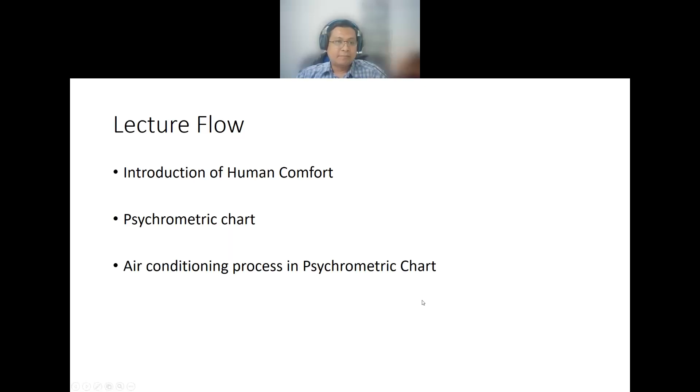In this moment, I will touch about three subtopics regarding air distribution: introduction of human comfort, psychrometric chart, and air conditioning process in the psychrometric chart. Okay, we will go in deep about these subtopics. So now we go first on the introduction for human comfort.

Human comfort expresses the level of satisfaction with a matter condition which occurred in the environment according to the perception of the individual. The most common matters are heat, thermal energy, air purity, sound, and lighting. So we relate comfort not only to temperature but also to sound or lighting.

Sometimes lighting makes some persons not comfortable, because every person has a sensitivity to lighting. Like me, for example, I'm very uncomfortable with lighting in a warm condition, warm colors like yellow. That's very difficult for me because I cannot see clearly in that situation. And then sometimes sound.

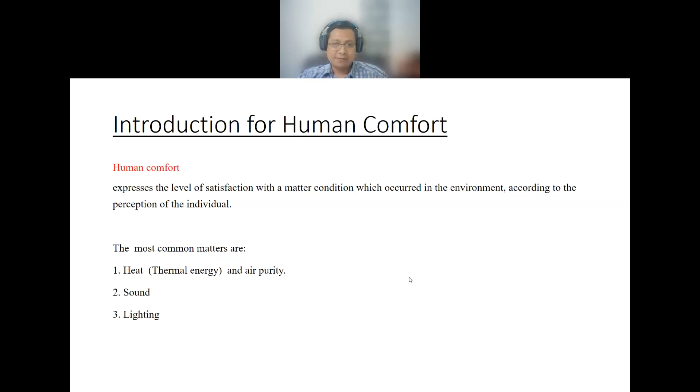Some places are very noisy, so it's very difficult to concentrate when we try to start to work and finish. It may take a long time, because it's difficult to perform well in a noisy condition. And sometimes being too sweaty makes it difficult to concentrate in our work. And then air purity may be influenced by the outdoor condition, or sometimes it's very dusty, or there's not enough oxygen supply.

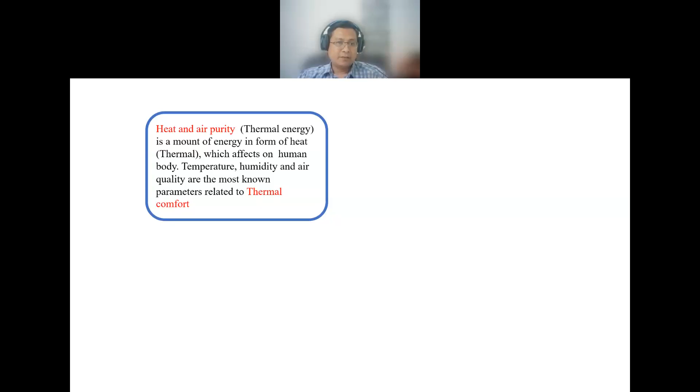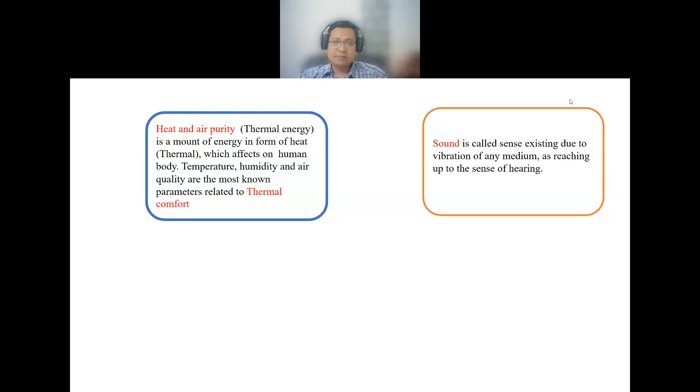Thermal energy is the amount of energy in the form of heat which affects the human body. Temperature, humidity, and air quality are the most known parameters related to thermal comfort. Sound is a sense existing due to vibration of any medium reaching the sense of hearing. Noise is the sound that causes discomfort. The procedure that overcomes the noise is called acoustic design. The acceptance level of sound is called acoustic comfort.

Sometimes music makes us relax, so we need to hear some music, maybe classical, to make us comfortable. But some persons work with a certain type of music, maybe rock. That cannot be mixed; we cannot generalize the condition to other persons. So different person, different comfort in sound.

Like me, maybe I need classical music with piano, or sometimes classical guitar and violin. But some persons need a sporty condition, to make the heartbeat more active, so they need sound with a high-speed beat. Only certain persons can work in that condition, so we cannot generalize it.

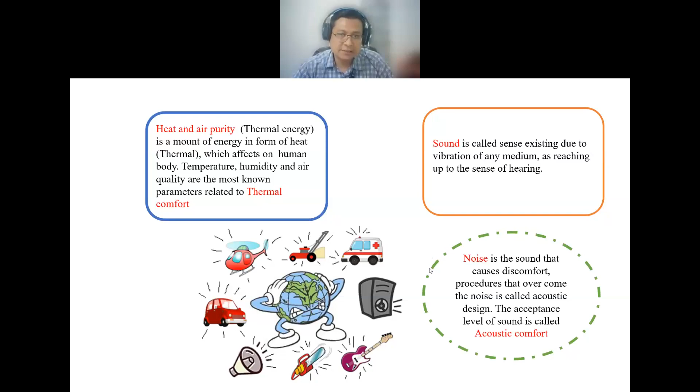Okay, now we're touching on lighting. Lighting is the amount of heat in the form of light that is adequate for visualization. Daylight and night light quality are attributes for sensory comfort. The acceptance of brightness and reflectance level for the eyeball is related to visual comfort.

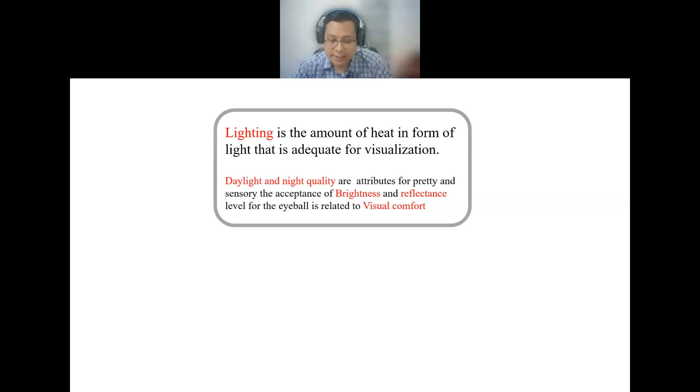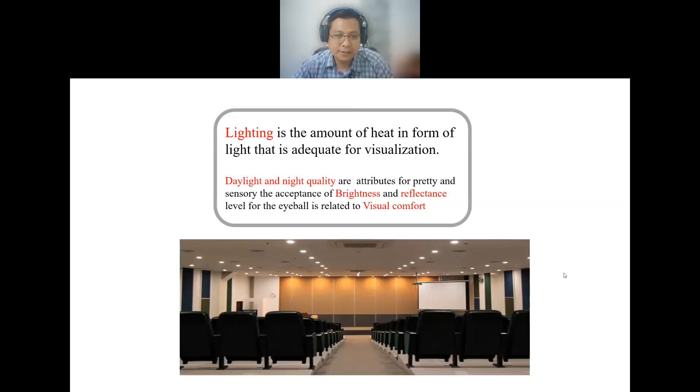As I mentioned before, sometimes a person is not comfortable with the tone of lighting. Like me, in yellow lighting I'm not comfortable. It makes things unclear when reading or in my work; maybe I need to type, but with that lighting condition it's difficult for me, and I cannot read in that tone of lighting. Okay, this one is an example of lighting comfort.

Based on human comfort, ASHRAE will guide us how to follow all condition parameters to create the comfort condition in a certain zone. Let's say this condition is for a seminar, or for a study room, or comfortable only for a theater. It's different, depending on the application.

The principal purpose of an HVAC system is to provide conditions for human thermal comfort. Human thermal comfort is a feeling of the human body when it tends to accept the thermal surrounding environment with indoor air quality. So as long as we can accept all parameters like air quality, temperature or humidity, we can consider that under human thermal comfort. This is considered under indoor air quality.

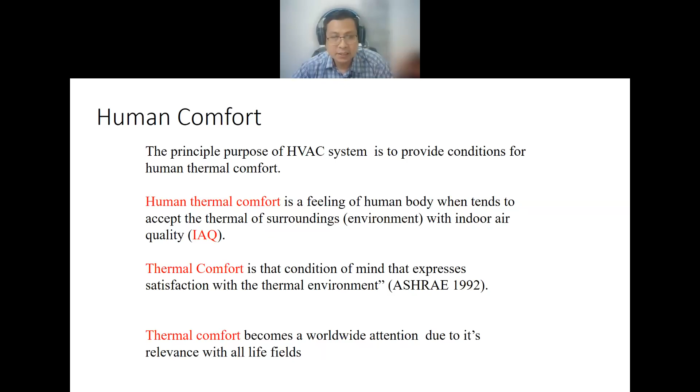Thermal comfort is that condition of mind that expresses satisfaction with the thermal environment under ASHRAE criteria. Thermal comfort has become a worldwide attention due to its relevance to all fields of life. Actually, now any building room is already equipped with HVAC. It's difficult to find a building without HVAC. Any building now is already under HVAC control.

How to find out the human comfort provided in a certain building? How to measure it? Human comfort is affected by 6 main factors. Among them, four are called environmental factors, while the rest two are called personal factors.

Environmental factors can also be provided by HVAC control, so we can condition it even near an unsafe environment, let's say nearest to industry with high emission or pollution. We can design the HVAC condition in the building, and we can design the dry bulb temperature condition by HVAC.

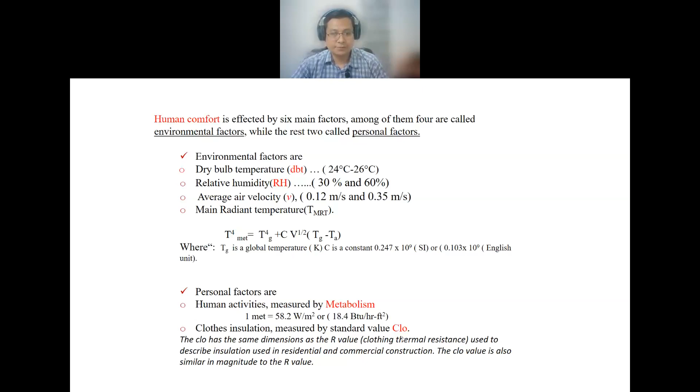So a lower CLO means lower insulation. If the CLO is higher, it means the clothing covers and protects more from the ambient condition. So we measure this using the unit CLO. We can check the CLO values later on.

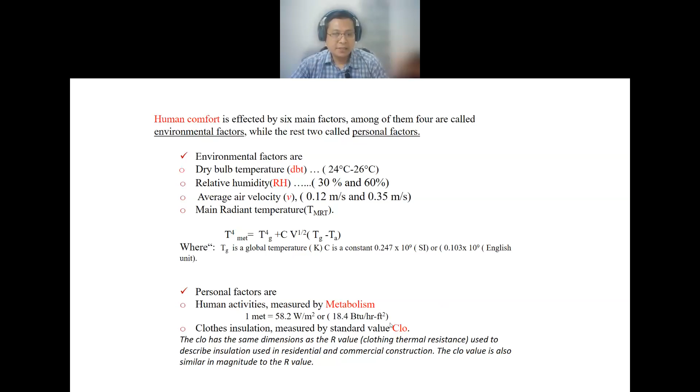This one is metabolism measured in normal human activity: one metabolism unit is 58.2 watts per meter square, or in British units, 18.4 British thermal units per hour per square foot.

Heat balance for the human body involves metabolism, heat generation by conversion of chemical energy due to digesting food. This differs by person and condition, but we can generalize and take the average condition of the person. Blood circulation and respiration will be influenced by the thermal effect caused by human activities.

Metabolism rate and clothing insulation can be determined directly from the total average heat generation and clothing insulation tables respectively. Metabolism rate depends on the activity, age, size, and gender.

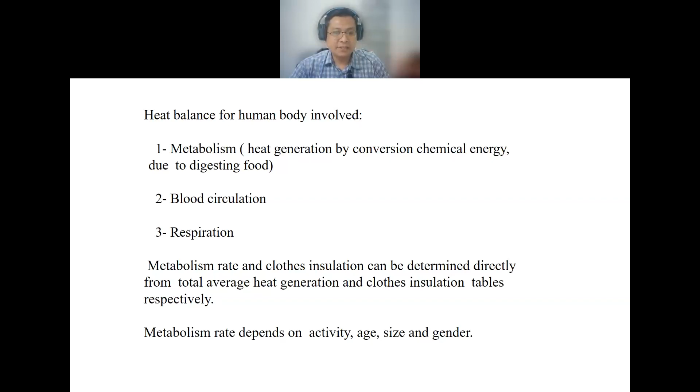Let's check the table of insulation caused by wearing activities. Let's say working in a short sleeve shirt; we will measure lower insulation because the body isn't covered, so it's exposed to the environment and the dress cannot insulate the thermal.

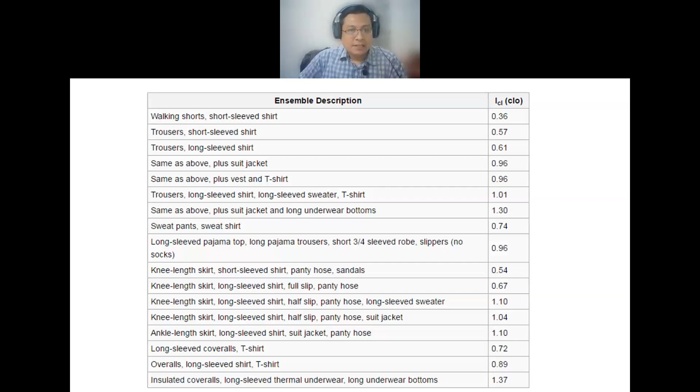Then with trouser and short sleeve shirt, trouser and long sleeve shirt, the insulation becomes increased because it's already long sleeve. You can see this increase. Same as above, plus jacket or suit jacket, it increases further. This is linear to the level of clothes covering.

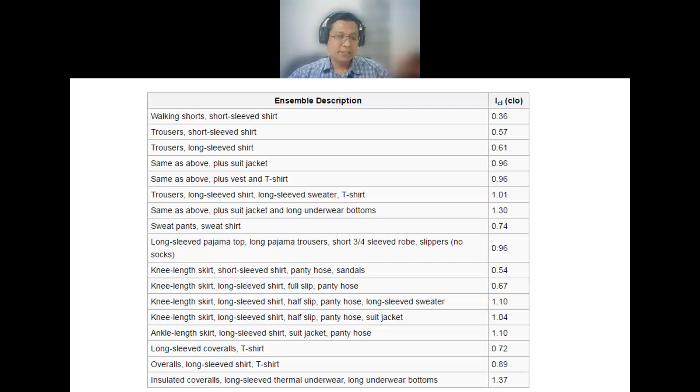Okay, that's for the parameters that influence human comfort in a certain building or area. Now we go to the psychrometric chart.

The psychrometric chart is another parameter of measurement to consider whether the condition is comfort or not comfort.

The psychrometric chart shows graphically the parameter properties relating to water moisture in the air. In the psychrometric chart we can measure several conditions: humidity, temperature, human comfort, and enthalpy.

Also air condition, air amount and quality - how much air is supplying in that room. So the psychrometric chart indicates the property of water vapor through the following parameters.

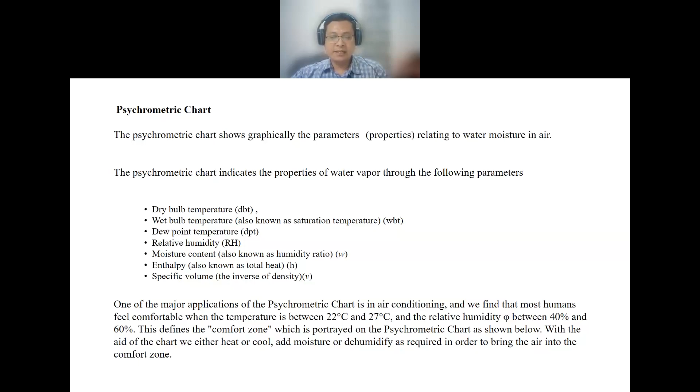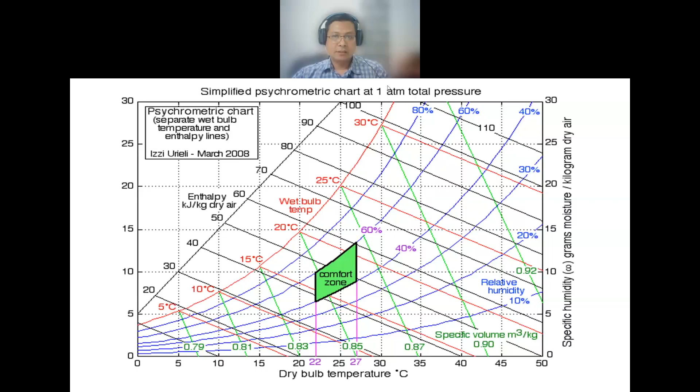That's how to read the psychrometric chart. Okay, any question? No, sir. Okay, I'll proceed to the next slide.

What information does this slide give us? Actually this slide informs us what parameters at one point can tell us. Okay, let's say this point.

This point will inform us about relative humidity - just find the line showing relative humidity in percentage. Then the dry bulb temperature on the x-axis, you can see the temperature range. And then, dew point temperature mentioned on this line.

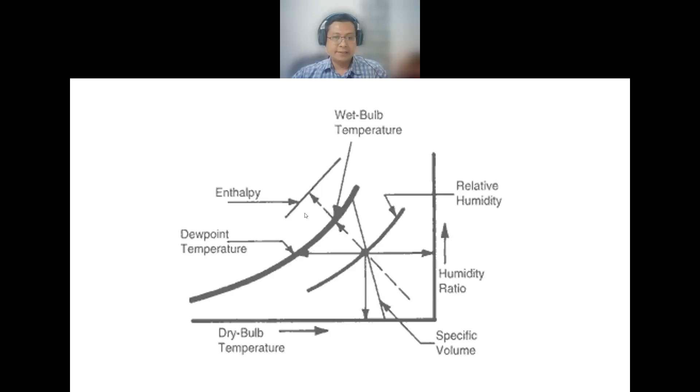Enthalpy on this line, and then humidity ratio, and then specific volume, this line. So how many lines? 1, 2, 3, 4, 5, 6, 7. Around 7 pieces of information we can get from the psychrometric chart.

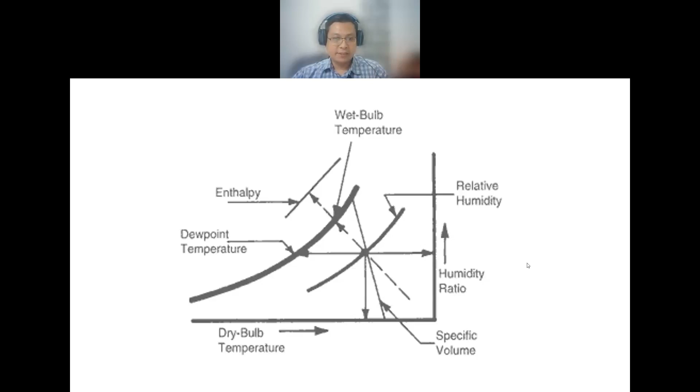All right. 1, 2, 3, 4, 5, 6, 7, 8. Oh, this one is similar information - this one is temperature. That's why we count 8, but actually only 7, since C and G are similar.

Cooling to go down, heating to go up - so heating goes to C, and cooling goes to G. Then H informs about evaporative cooling only, and D is chemical dehumidifying, and so on.

All right, air conditioning process in the psychrometric chart. There are 8 processes in the psychrometric chart for aircon. Okay, we have 8: sensible cooling, describing decreasing of dBT with constant W.

Sensible heating is increase of dBT with constant W. That's how we achieve human comfort using the psychrometric chart - we try to maintain a certain condition, or increase a certain condition, to achieve that.

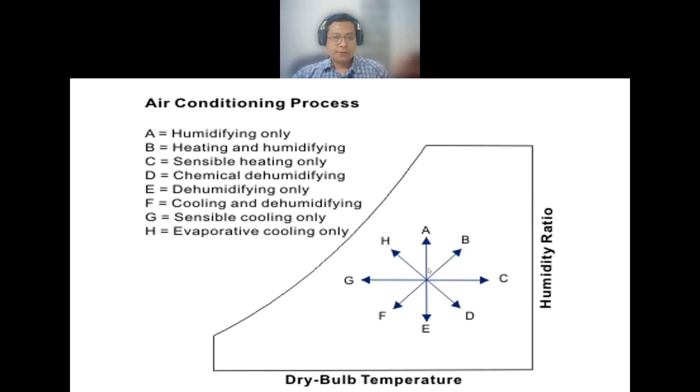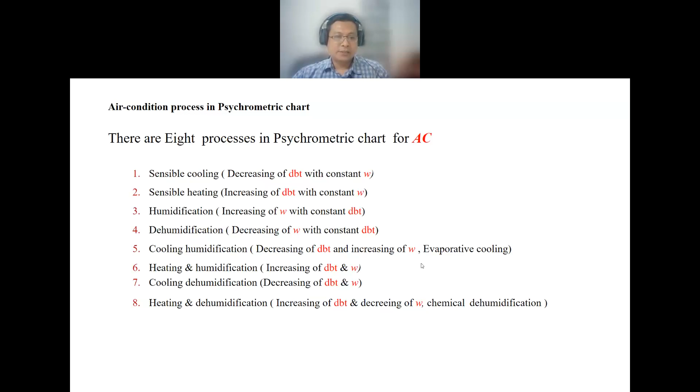And then we can see sensible heating, humidification (increasing W with constant dBT), dehumidification (decreasing W with constant dBT), cooling with humidification (decreasing dBT and increasing W), and evaporative cooling. This is how we control it in the air conditioning system - the condition should remain in the human comfort area, the green area we saw before in this slide.

The dry bulb temperature is the commonly measured temperature from the thermometer. It's called dry bulb since the sensing tip of the thermometer is dry, as opposed to wet bulb temperature. Dry bulb temperature is located on the horizontal or x-axis of the psychrometric chart, and lines of constant temperature are represented by vertical chart lines. Since this temperature is so commonly used, it can be assumed that temperature means dry bulb temperature unless otherwise defined.

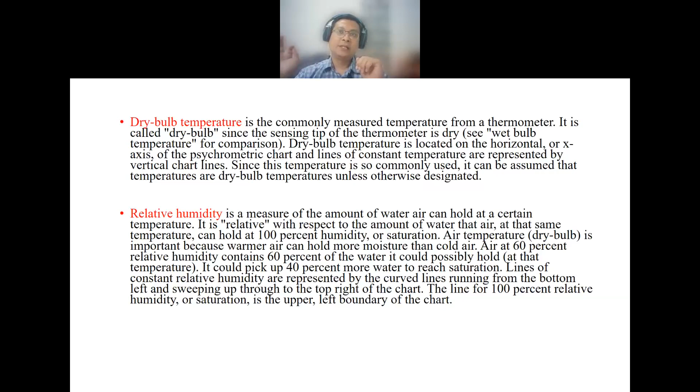Dry bulb is measured with the thermometer as just the normal temperature, without any influence or wetness touching the thermometer. It means the thermometer is clean from anything like a wet condition - just measured directly from the air. That's why we call it dry bulb.

How to see the dry bulb in the psychrometric chart is on the x-axis direction. So we can get the dry bulb information from there in the psychrometric chart.

Relative humidity is a measure of the amount of water air can hold at a certain temperature. It is relative with respect to the amount of water the air at the same temperature can hold at 100% humidity or saturation. Dry bulb temperature is important because warmer air can hold more moisture than cool air. At 60% relative humidity, the air contains 60% of the water it could possibly hold at that temperature - it could pick up 40% more water to reach saturation. Lines of constant relative humidity are represented by curved lines running from the bottom left and sweeping up to the top right of the chart. The line for 100% relative humidity or saturation is the upper left boundary of the chart.

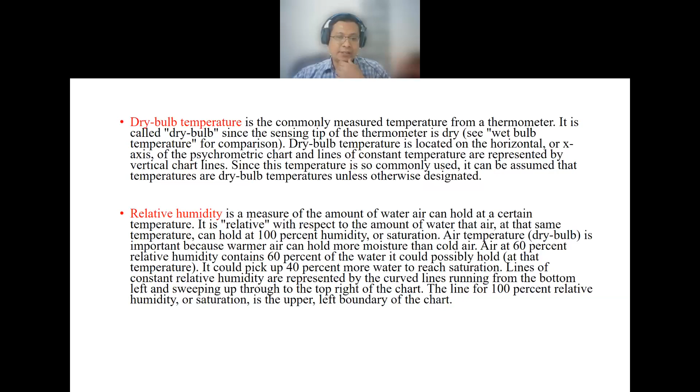So relative humidity measures the water content in the air. Once it's considered 100%, it means the air is already at saturation - meaning it's already fulfilled by water in the air, so it will feel very wet. It's like when it already performs as smoke - when the air is already at 100%, you can see it like smoke or smog, or maybe it forms like a cloud.

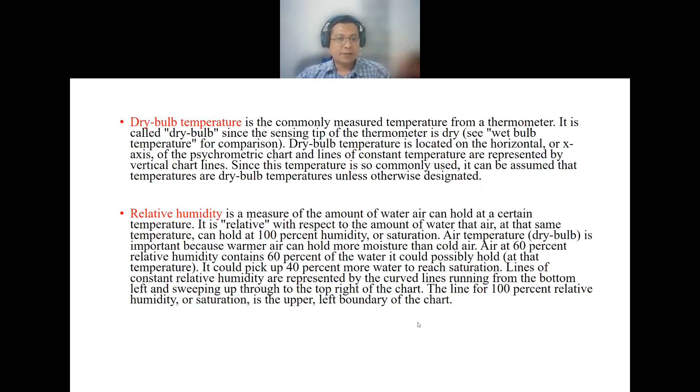How do we see this in the psychrometric chart? Just follow the curving line from the bottom, running upward - this is the relative humidity line I already mentioned just now.

Wet bulb temperature is determined by when air is circulated past a wetted sensor tip. It represents the temperature at which water evaporates and brings the air to saturation. Inherent in this definition is an assumption that no heat is lost or gained by the air. This is different from dew point temperature, where a decrease in temperature or heat loss decreases the moisture holding capacity of the air, hence water condenses. Determination of wet bulb temperature on the psychrometric chart follows the line of constant enthalpy, but values are read off the upper curve saturation temperature boundary.

Let's go to the definition first - how to measure the wet bulb temperature? Just use the same thermometer, but cover the tip with a wetted cloth, and then try to measure. That means there's no thermal or heat loss from the condition of the air. That's why we call it wet bulb temperature.

How to find the wet bulb temperature is just on the left side of the psychrometric chart. We can find the level - wet bulb temperature will be mentioned there on the left bar. The curve performs like a curving line - just follow the curving.

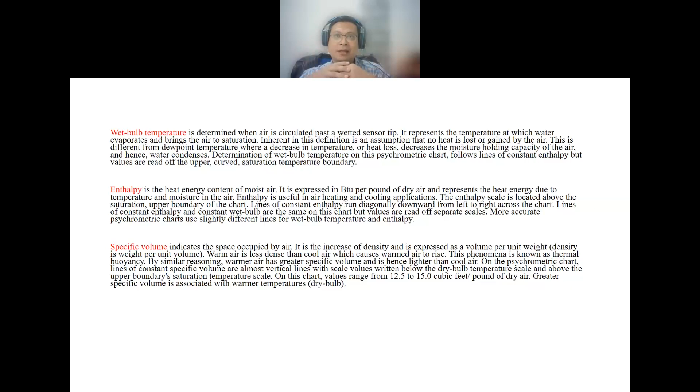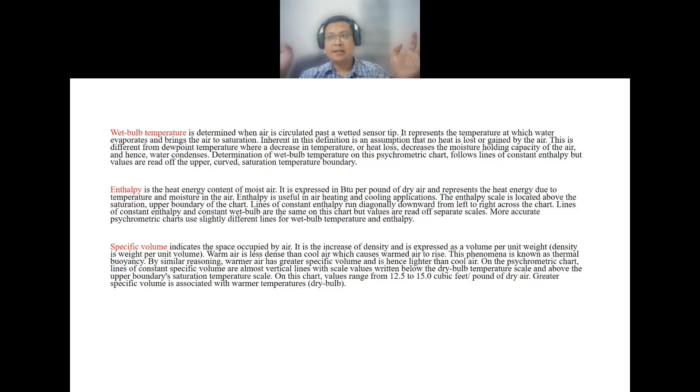And then how about the high pressure we create in a certain area? So what happens? If we create that, we will release heat loss. We release the temperature to the outside environment because we are at high pressure. So we will get inefficiency in energy, because we will release air to the outside, maybe from the door or windows.

So the enthalpy should also be created for human comfort, the same as the outside environment. Specific volume indicates the space occupied by air and is expressed as volume per unit weight. Density is weight per unit volume. Warm air is less dense than cool air, which causes warmer air to rise. This phenomenon is known as thermal buoyancy. By similar reasoning, warmer air has greater specific volume and is hence lighter than cool air.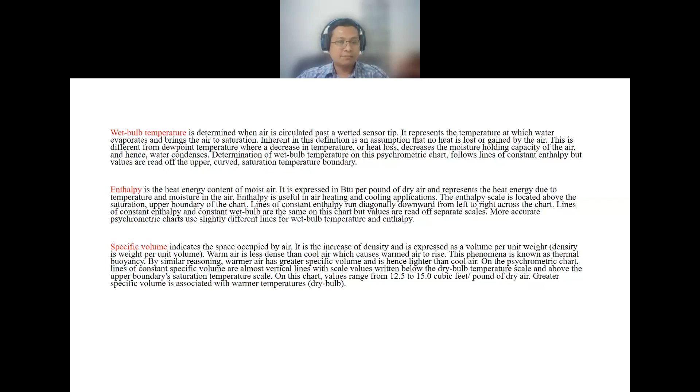On the psychrometric chart, lines of constant specific volume are almost vertical lines with the scale values written below the dry bulb temperature scale and above the upper boundary saturation temperature scale. On this chart, values range from 12.5 to 15 cubic feet per pound of dry air. Greater specific volume is associated with warmer temperature. Okay, specific volume is an indicator of whether the amount of air is sufficient to serve people.

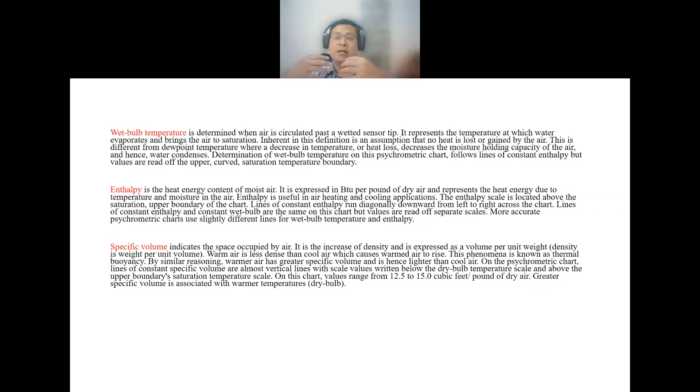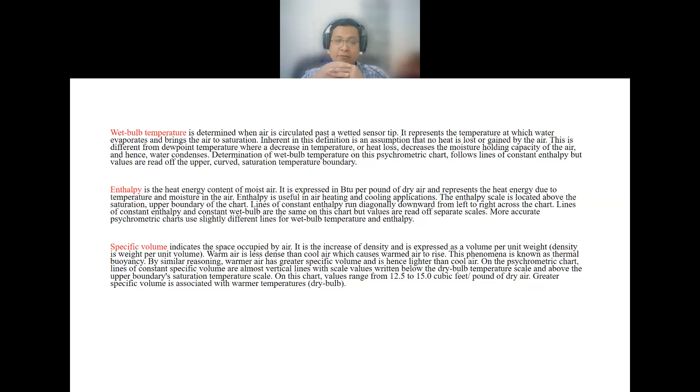So the amount of air should be measured. If the room contains a certain number of people and needs more oxygen, you should make sure the oxygen or temperature supplied inside is satisfactory. So it should be measured by specific volume. You need to supply the amount of air inside the zone. That's why we need to measure the specific volume, and the number is within 12.5 to 15. So make sure this amount is enough.

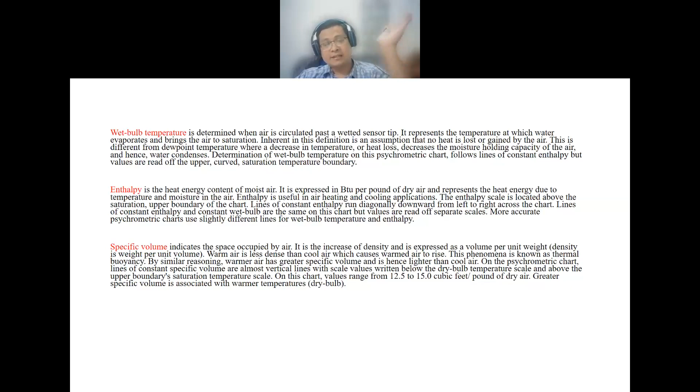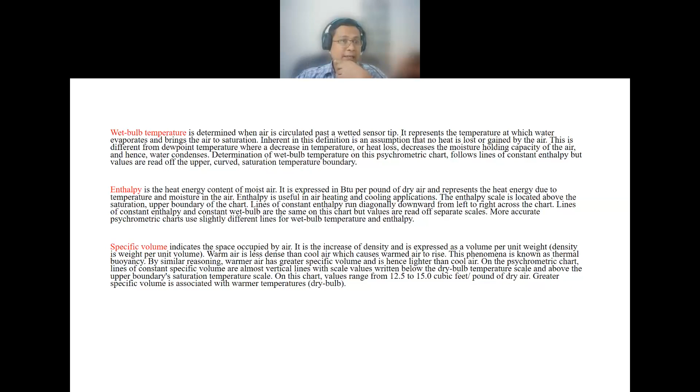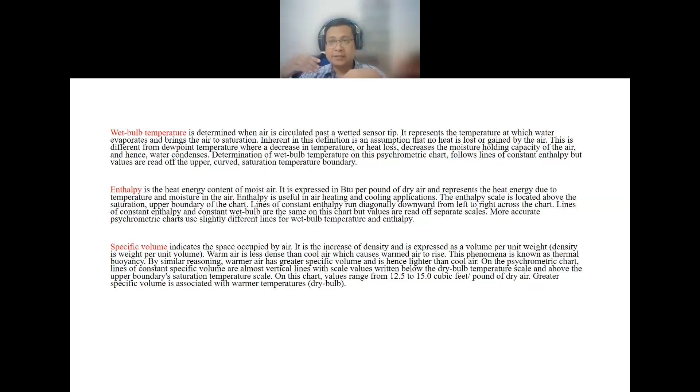And then how to see it in the psychrometric chart? We can see a diagonal line to the left side. You can see the value is like the dry bulb temperature, but with a different number mentioned on the x-axis of the psychrometric chart. So you can find there the number of specific volume.

Humidity ratio of moist air is the weight of the water contained in the air per unit of dry air. This is often expressed as pounds of moisture per pound of dry air. Since the humidity ratio of moist air is not dependent on temperature, it is easy to use in calculations. Humidity ratio is found on the vertical y-axis with lines of constant humidity ratio running horizontally across the chart. So we can see it on the y-axis on the right side of the psychrometric chart.

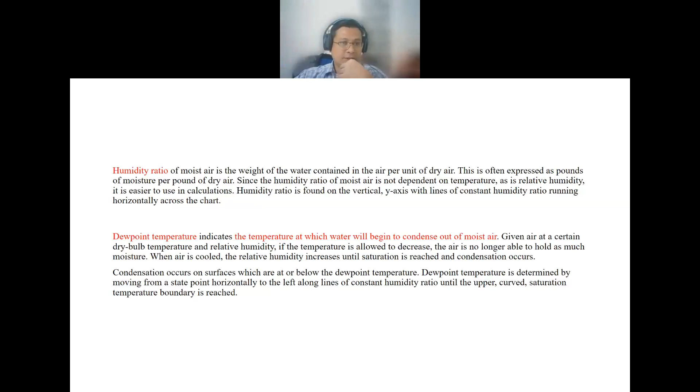Dew point temperature indicates the temperature at which water will begin to condense out of the moist air. Given air at a certain dry bulb temperature and relative humidity, if the temperature is allowed to decrease, the air is no longer able to hold as much moisture. When air is cooled, the relative humidity increases until saturation is reached and condensation occurs. Condensation occurs on surfaces below the dew point temperature. Dew point temperature is determined by moving from a state point horizontally to the left along a line of constant humidity ratio until the upper saturation temperature boundary is reached.

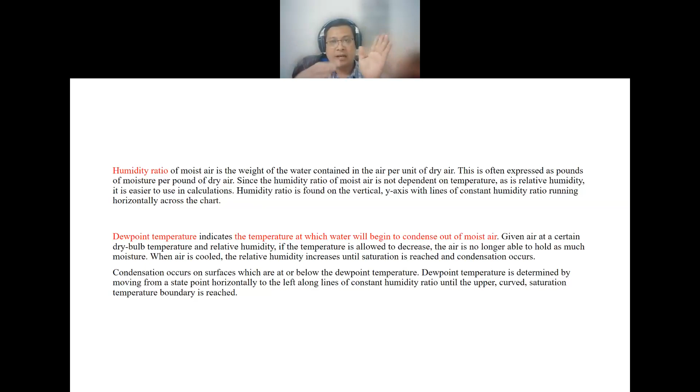Okay, as we know, dew point is when the saturation pressure meets the saturation temperature, so it becomes condensation. So we should avoid this condition. We don't go below that temperature. So we try to lower the temperature while avoiding saturation. This temperature is actually difficult to find if I just explain without the psychrometric chart.

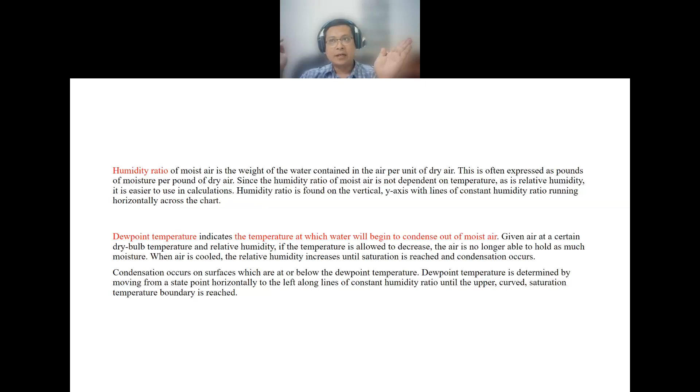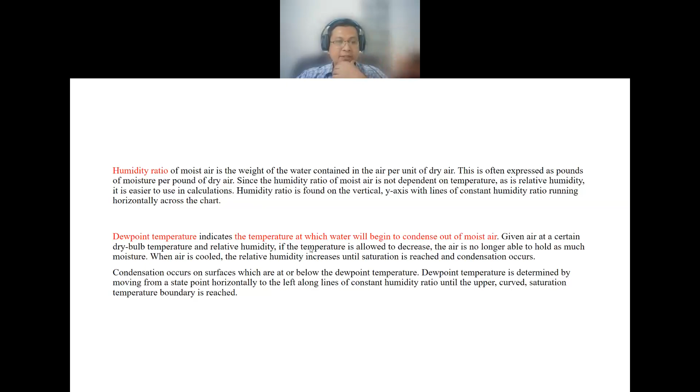Never mind. I will give you an example of how to carry out the information in the psychrometric chart. Okay, this one, what I mentioned, we will go to analyze the psychrometric chart. Okay, we have example one here.

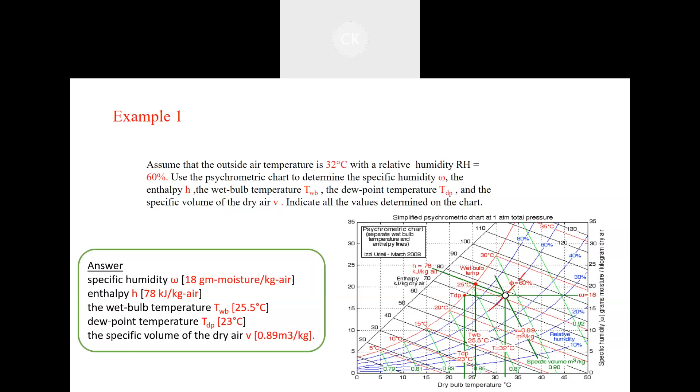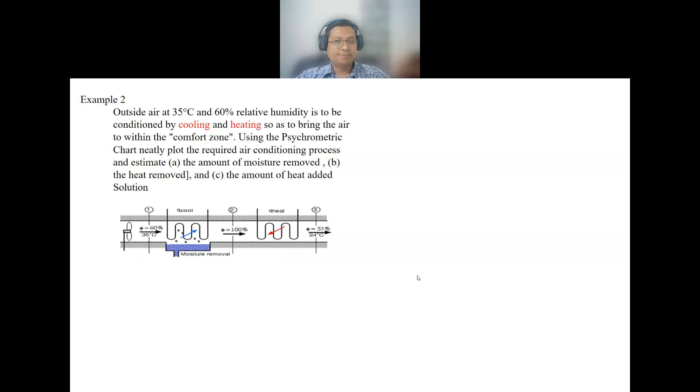And then C, the amount of heat added, the third condition after cooling and then heating. So in the first treatment we remove the moisture, and then we add heat to increase the temperature, with no more change in moisture. Let's check the answer. We have the intersection of 35 and 60 in the first condition, point 1 in the graph.

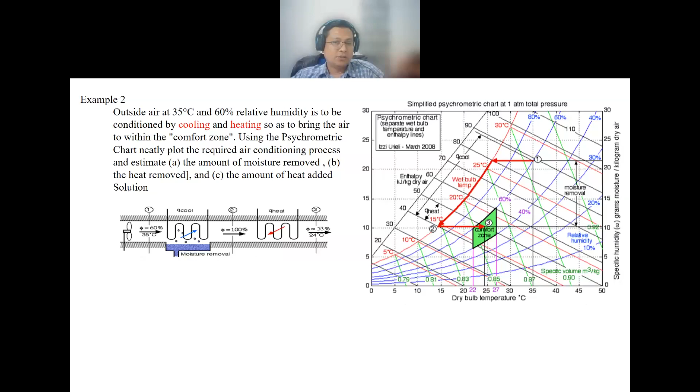After that, we remove moisture. This one is still at 60, becoming a lower temperature of 25, point 2 here, and then 3. So we remove until around 50 something of final moisture, so maybe around 10% is removed.

The target is the comfort zone. Where we come from, temperature is not comfortable, but humidity is. Enthalpy is not comfortable. So we reduce the enthalpy, we reduce the specific humidity ratio, and after that we come to the comfort zone, the green area. That's how they treat it.

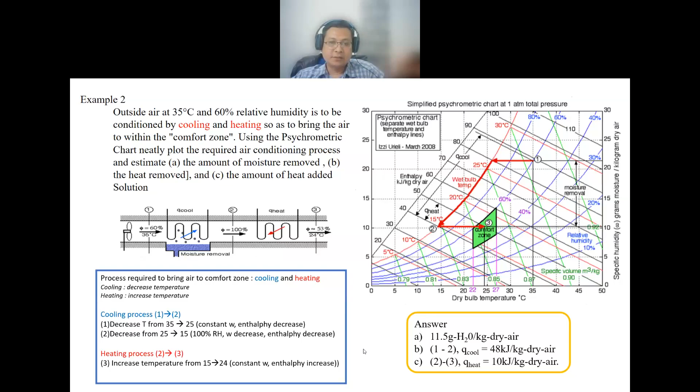If you mention the temperature, the temperature is also reduced from 35 to 25, so around 10 degrees Celsius. That's how we try to recondition the air to become the comfort zone.

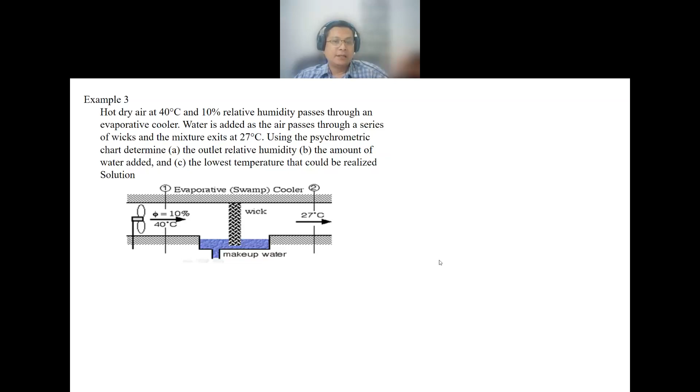That's the solution. Okay, we should understand the situation first. Let's check the figure. In the figure the humidity is actually low. Then we try to add humidity by putting the wick, the wet wick, influenced by water here. So we add the wet wick here, and then we can increase the humidity. Okay, let's check the graph.

Okay, first condition, 40, where is it? This one. And relative humidity 10%, passing through the evaporative cooler. The one is 40 degrees with 10%. Okay, 40 degrees, this one. And then 10, come here. It is still far away from the comfort zone. Then we can reduce the temperature and add humidity.

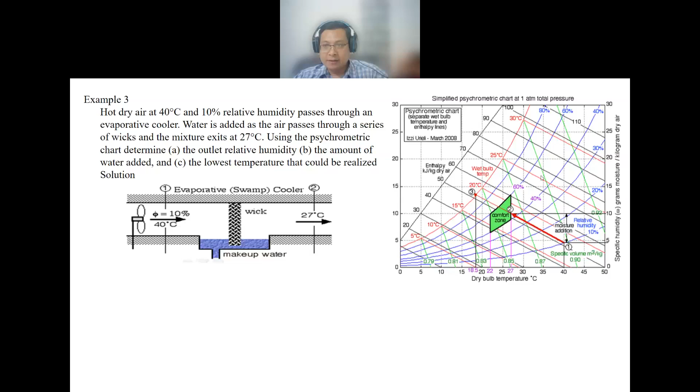Okay, this one, 10%, sorry, 10% with the 40, this one. And then we go to the comfort zone. So reduce to within around 22 to 27. We can choose anyone within this area, and then we can reduce the temperature and add the humidity.

Process required to bring air to the comfort zone: increase humidity, add water, no heating and cooling process. So in the psychrometric chart, increase the humidity without increasing the enthalpy. And then we can get the answer, 45% relative humidity. We choose 40, and then 10. Here the ratio, sorry, not percent, 10.

Specific humidity ratio, and then in this one we still maintain the specific volume, maintained at around 0.9. Specific volume in meter cube, around here. So it is maintained, and then the enthalpy is also maintained. So in the comfort zone, the lowest temperature that could be realized can be 18.5.

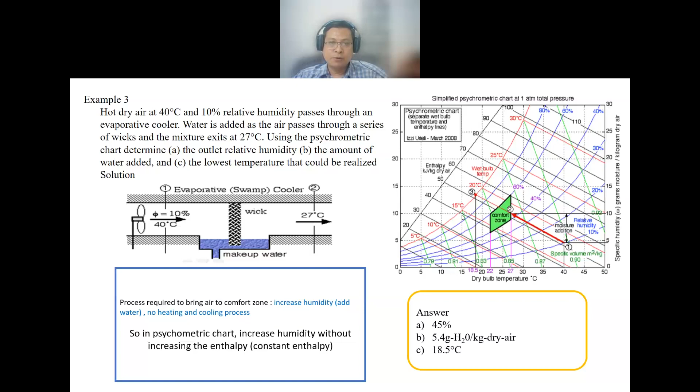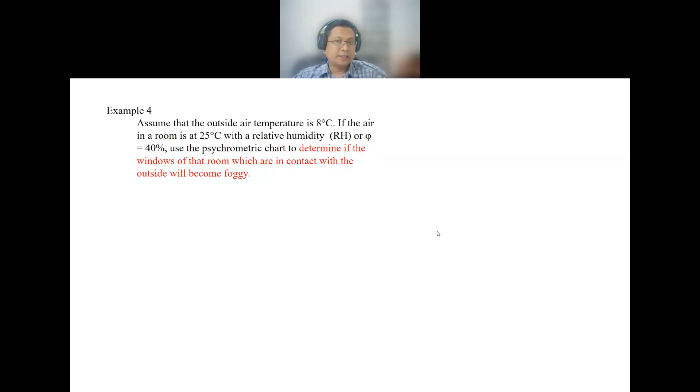Okay, then we go to example 4. I think this one is the last example. Assume that the outside air temperature is 8 degrees Celsius, and the air in a room is 25 degrees with a relative humidity of 40%. Use the psychrometric chart. Okay, let's go fast.

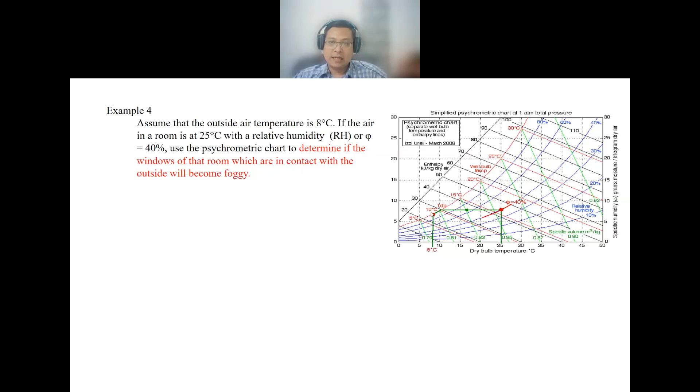First condition is 8, and then the room is 25 degrees, relative humidity 40. So we go to 25 degrees with 40% RH. So the target should be here. Then the air in contact with the window will become colder, and the dew point is reached. Notice what you find if you go to this one.